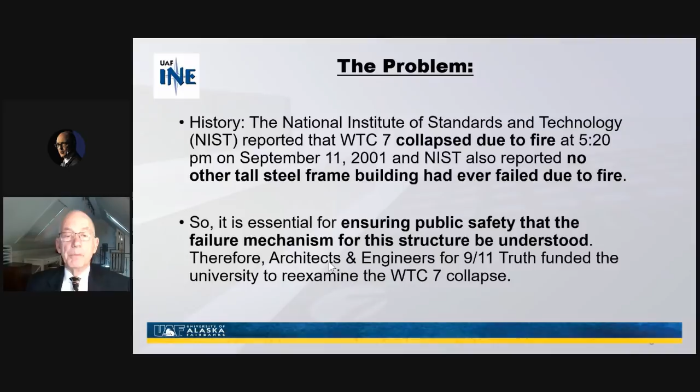The NIST report said that the building had collapsed due to fire. And they also said that no other tall steel frame building had ever failed due to fire. So it was essential for public safety that we understand the failure mechanism of this structure. And since the NIST report said that it had failed due to the unprecedented event of office fires, Professor Hulsey understood that this was a matter of supreme importance for our profession.

The science behind the study was first to examine the fire loads, which were supposed to have caused the failure on floors 12 and 13, and then determine how the building was going to react to the thermal loads. Secondly, rule out scenarios that couldn't have caused the failure. And third, identify the type of failures and locations that could have contributed to the observed collapse.

He used the same material properties that NIST used in their report to ensure that the input values for the materials would be the same.

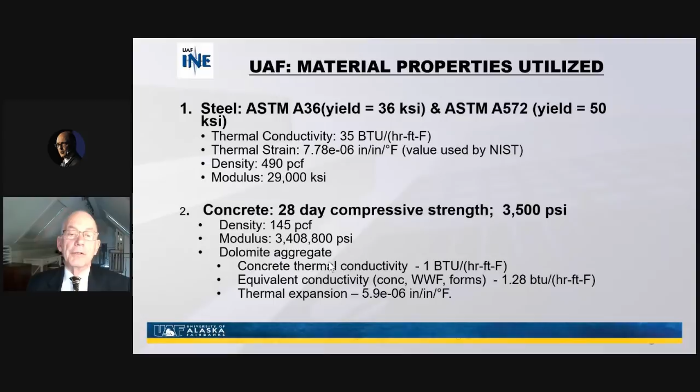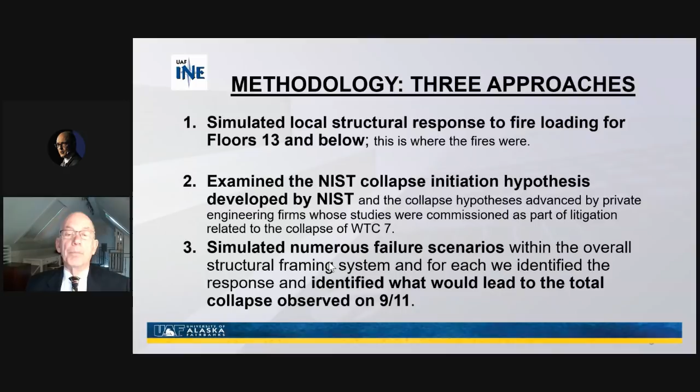First, he simulated the local structural response to fire loading to floors 13 and below, which is where the fires were. Then he examined the NIST collapse initiation hypothesis and the hypotheses advanced by the private engineering firms whose studies were commissioned as part of litigation related to the collapse of the building. And third, to simulate the numerous failure scenarios within the overall structural system that could have possibly led to the total collapse as it was observed.

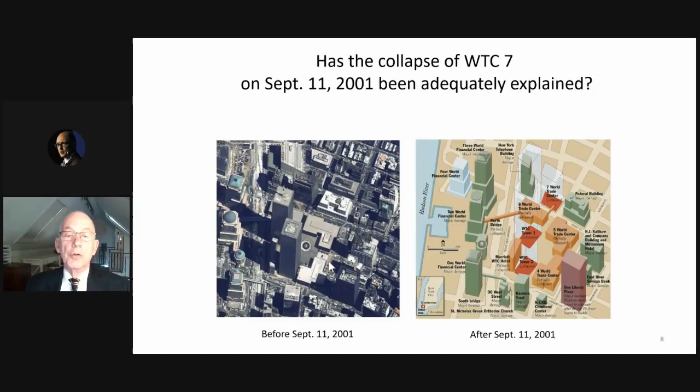The buildings and their relationship to one another are shown here. The towers, 1 and 2, the North Tower and the South Tower, Building 7, which was a 47-story structure to the north of Building 1, about 350 feet to the north of the first tower. The reports that have been issued on the Building 7 failure are these.

The FEMA report, which was a preliminary assessment, was issued in May of 2002. Then NIST, which was given the power by Congress to issue a report on the cause of the failures, issued their report on Building 7 in November of 2008. Then the Arup Group was hired by the plaintiffs, Con Edison, as a result of the fact that the Con Edison substation, which was built underneath Building 7, was damaged. They sued World Trade Center 7 in

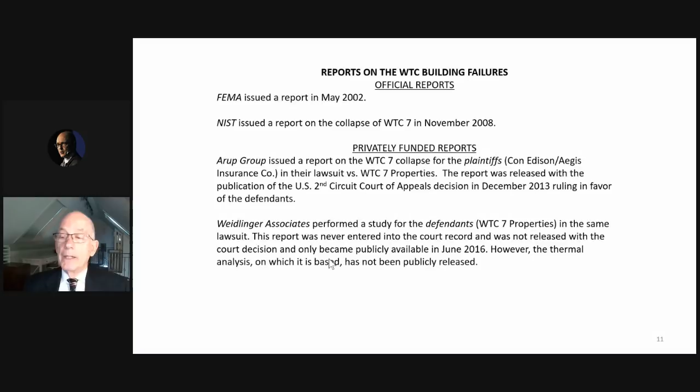2010. Then Weidlinger was another engineering firm which defended the World Trade Center properties in that same lawsuit. Their report, however, only became available in June of 2016 without their thermal analysis. And then our report, which was issued yesterday.

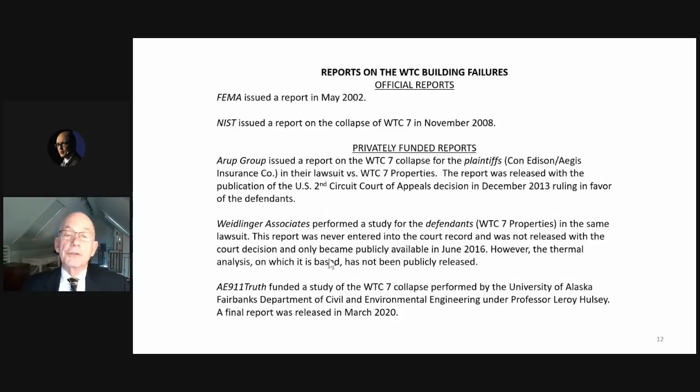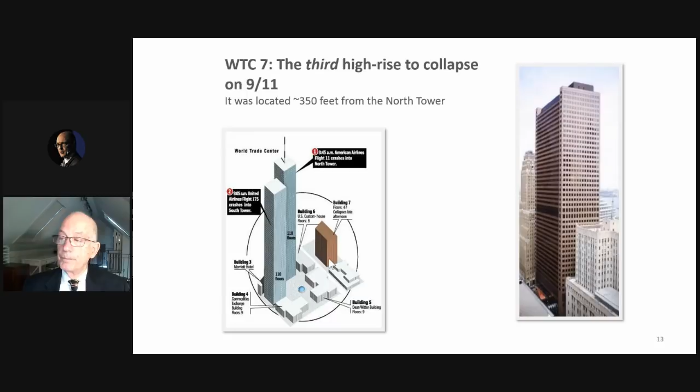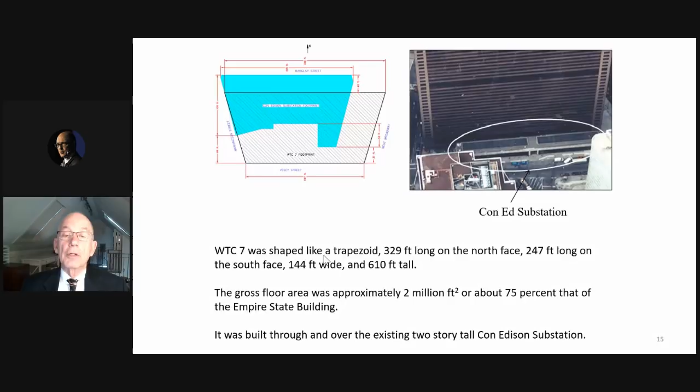The World Trade Center 7 building was the third high-rise to collapse that day. The location of the building was about 350 feet from the North Tower. It was 47 stories high. Each floor had about an acre of area. It was a trapezoidal floor plan. The gross floor area was about 2 million square feet, and it was built through and over the existing 2-story tall Con Edison substation. It contained 82 columns in its floor plan, 58 on the perimeter, 24 in the central core.

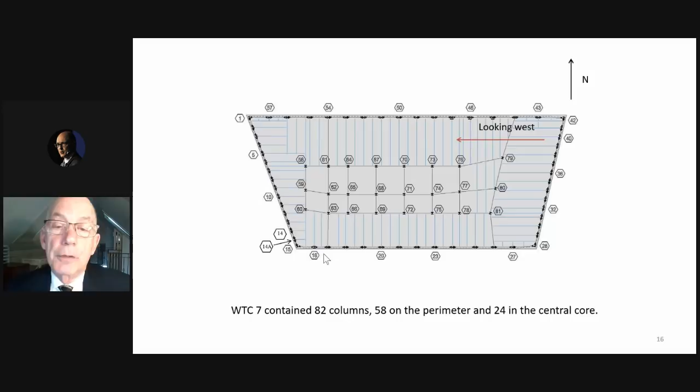We see that layout here. The area of interest is in the northeast corner of the building where the red arrow is. That is the area that NIST identified as the place where the initial event causing the collapse took place. We'll take a look at that here in a photograph taken at the time of construction of the building. Looking west from that corner, we see the girder of interest, determined to be called girder A2001 in the plans. And we see the beams coming in from the east side of the building, framing into the girder.

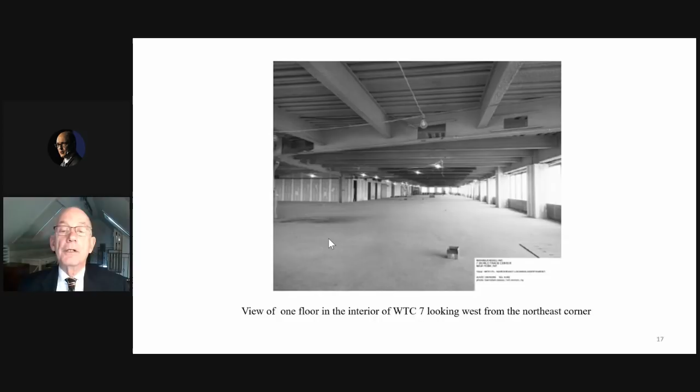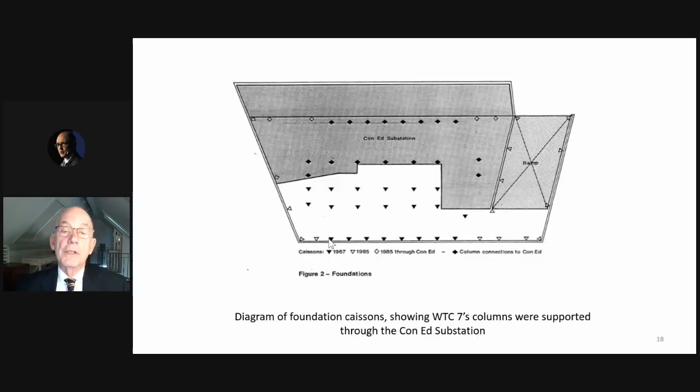This is a plan of the foundation showing the caissons supporting the Con Ed substation and the connections of the beam of the columns of World Trade Center 7 building to those caissons. A photograph taken during construction. We can see the perimeter columns here on the outside, the girders connecting those columns, the framing, and above that, we see the core columns coming up through the floors in the area of the elevators and the stairwells.

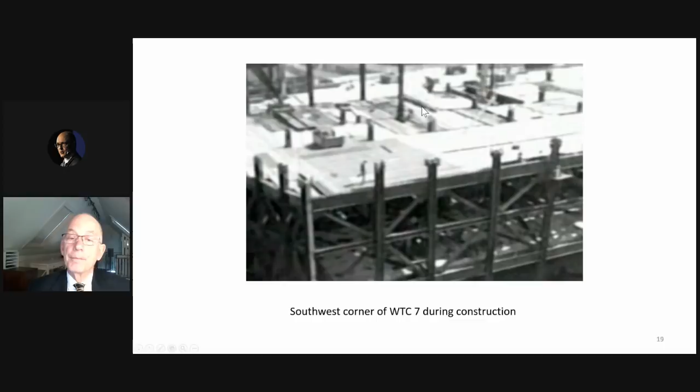The 610-foot tall building, which was not hit by a plane, collapsed that day in the late afternoon at 5:20 and turned into a 5-story pile of rubble in about 7 seconds.

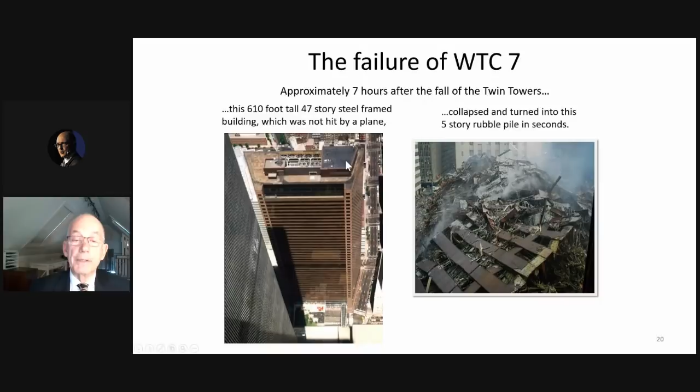For the third time today, it's reminiscent of those pictures we've all seen too much on television before, when a building was deliberately destroyed by well-placed dynamite to knock it down. Did they actually use the word brought down, and who was it that was telling you this? The fire department, and they did use the word, we're gonna have to bring it down. We heard this sound that sounded like a clap of thunder. A shockwave ripping through the building, and the windows all busted out. About a second later, the bottom floor caves out. The building followed after that, and we saw the building crash down all the way to the ground. And I turned in time to see what looked like a skyscraper implosion. Looked like it had been done by a demolition crew. The whole thing just collapsing down on itself. It was almost as if it were a planned implosion. It just pancaked.

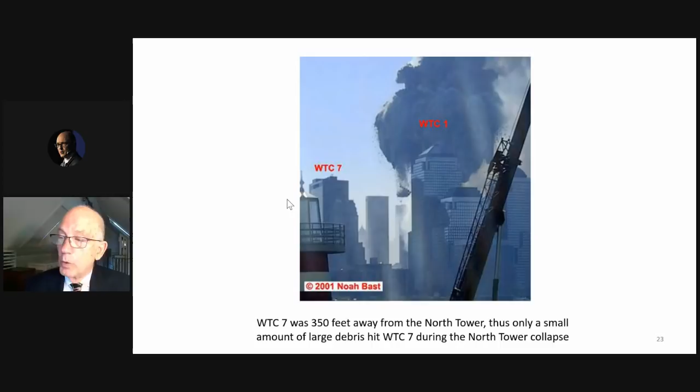Here you can see the relationship of World Trade Center 7 to the World Trade Center 1, which is collapsing as this photo was taken.

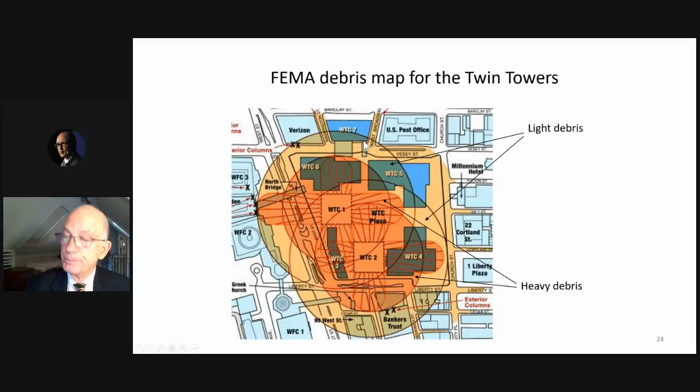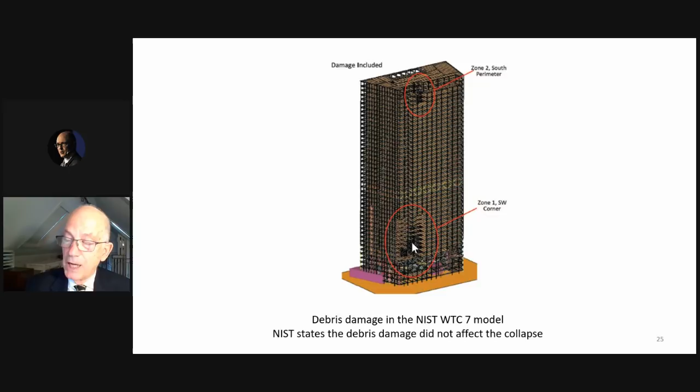The debris pile from the two towers is shown here in a FEMA debris map. We can see that World Trade Center 7 was hit by some light debris on the south face of the building. Here's FEMA's or NIST's representation of that damage. The damage in the lower southwest portion of the building is the area where the fires started, and it was presumed that the impact of the damage caused those fires to start. However, NIST stated that the debris damage from the towers did not affect the collapse in any way.

The fires themselves - at first FEMA thought they were maybe caused by diesel fuel in the building, which would be used for the backup generators. That was later disproved. Most of the diesel fuel was found in tanks underneath the building.

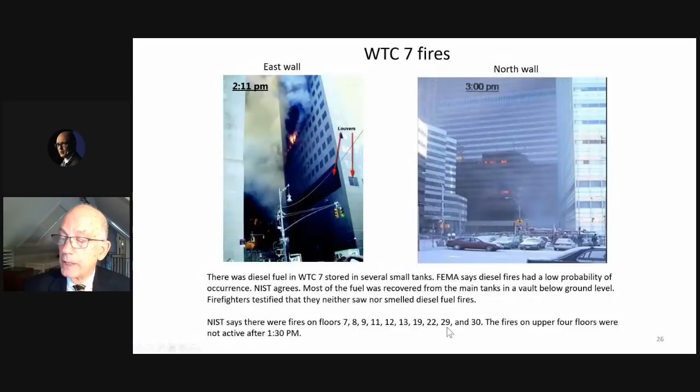We note, and NIST notes, and we agree with this, the fires of concern were on the 7th, 8th, 9th, 11th, 12th, and 13th floors. The fires on the higher floors - 19th, 22nd, 29th, and 30th - were out shortly after they began.

So the NIST World Trade Center collapse theory looks like this. On floor 13, these 5 beams in the northeast corner of the building were heated by the fire. They pushed on girder A2001, which ran between column 44 and column 79, off of its seat - or in some, they have an alternative scenario, which we'll discuss, maybe pulled it off. So they say it was either pushed off or pulled off its column seat at column 79.

And that caused the girder to fall, and it hit the floor below, hitting the same girder underneath it on the 12th floor, breaking it loose. Fire damage also contributed to other beams in that area failing at the same time. And that left column 79 unsupported because the floors cascaded down all the way down to the 5th floor.

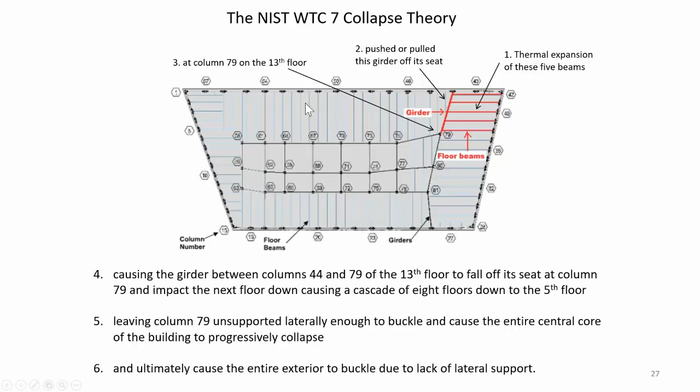So then you had a long unsupported column with a heavy load on it. It buckled, and that caused the entire core columns to fail in a progressive manner, which then led to the failure of the perimeter columns, and that's what caused the building to collapse. So that's the NIST collapse theory.

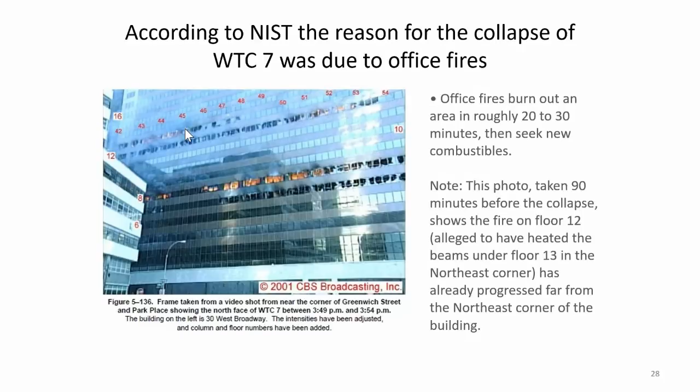From the NIST report, we look at the information regarding the local failure that initiated the whole event, namely the coming off of its seat of the girder A2001 at column 79. So this is column 79 here. Here's the seat that the girder sat on. It was supported by a plate, which was welded to the column.

According to NIST, that girder was considered to have lost its vertical support when its web was no longer supported by the bearing seat. The bearing seat on column 79 was 11 inches wide, so that when the girder end at column 79 had been pushed laterally at least 5.5 inches, it was no longer supported by the bearing seat.

However, the drawings showed that the plate was actually 12 inches wide, not 11 inches wide, and NIST actually later admitted that when they were informed of that.

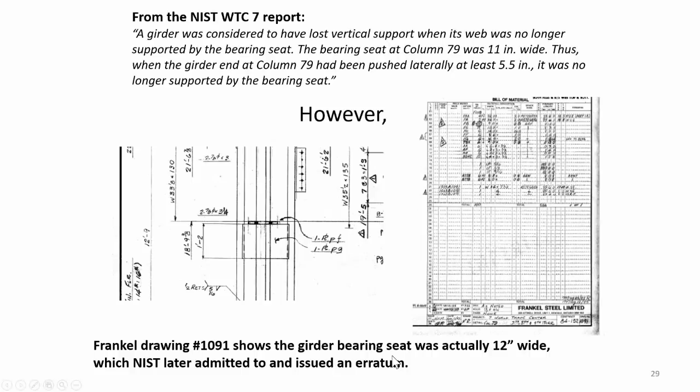Now, the NIST depiction of the girder sitting on its seat is shown here, and we see the web of the girder here sitting over the base plate, and it's got some clips attached to it. The plan view is here - you see the column with the girder coming in, sitting on the seat.

However, there's a problem with their depiction, and that is there were stiffeners welded to the end of the girder, welded to both the web and to the lower flange. This is the actual construction drawing, the Frankel drawing, that shows there were indeed stiffeners welded to the end of the girder. This makes a huge difference in their analysis.

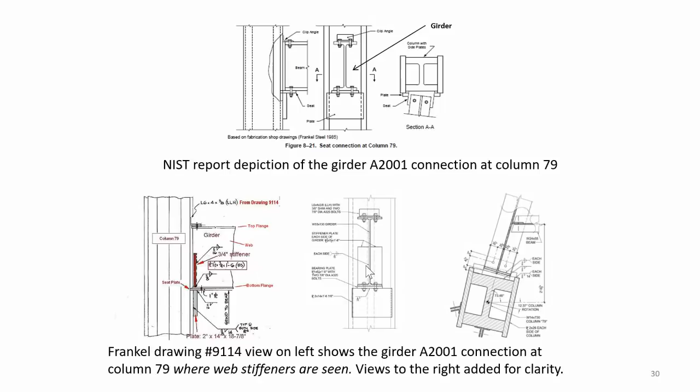This is a pictorial view of the same thing: the support plate, the base plate, the girder, the beams that were pushing on it, and the stiffener plates, which were welded to the web and the lower flange.

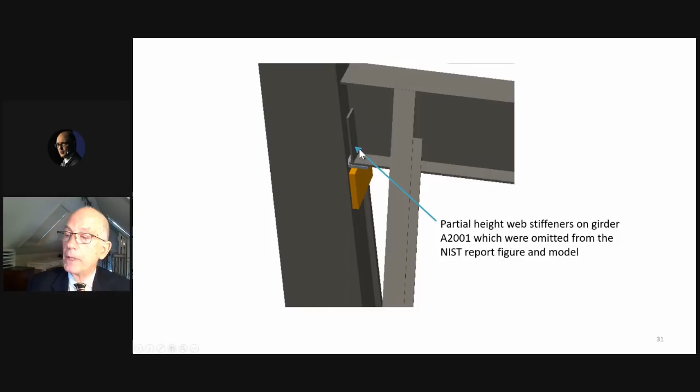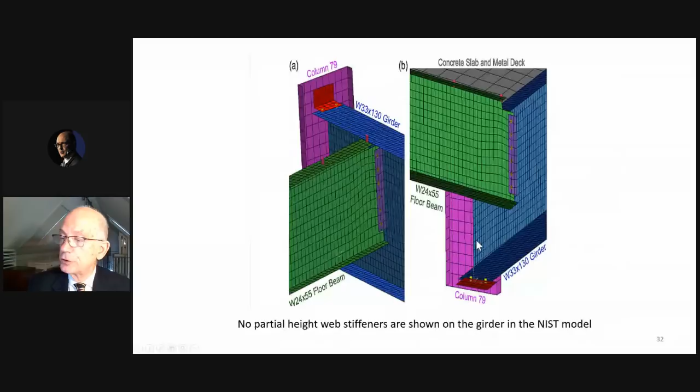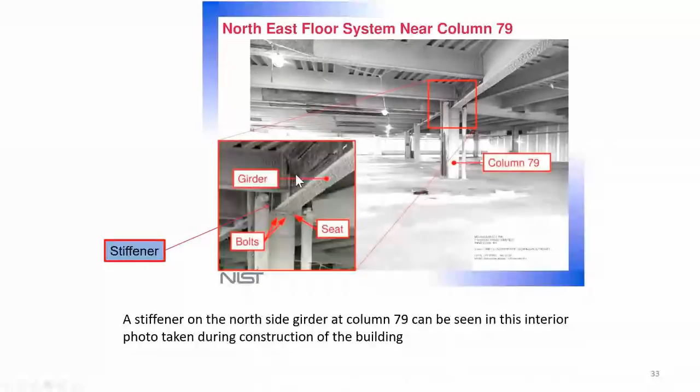In the NIST presentation, this is the beam, the girder, and the column. Again, you've got the girder and the column here. There are no stiffeners shown - they did not include them. We know that they were there; construction photos show that they were there. This is column 79 - here's the beam and the girder and the stiffener plate, clearly shown in the photographs.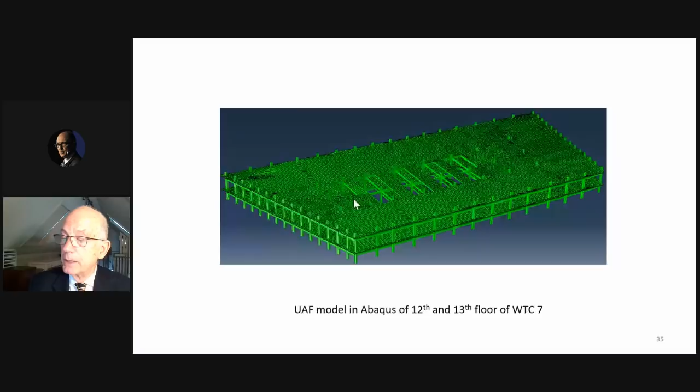Now, when Professor Hulsey and his crew did their finite element modeling of the building, they started with a model in Abaqus of the 12th and 13th floor. Here's the northeast corner, perimeter columns, the core columns here, the elevator shafts and stairs here. This is column 79, located here.

The UAF study took the worst case scenario for the temperatures used in their model. This shows the 13th floor with color variation showing temperatures, displayed in Celsius at 675 degrees, which is about 1,200 degrees Fahrenheit.

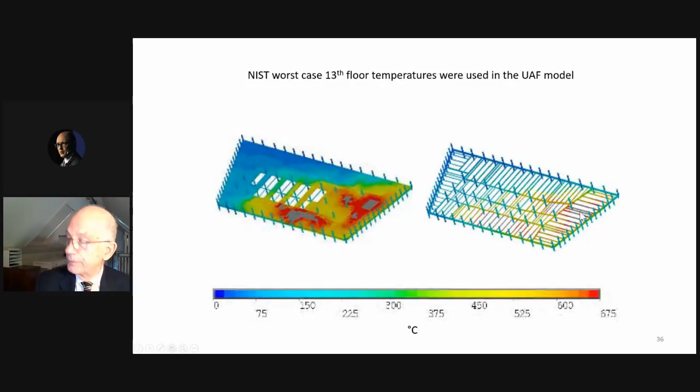So they show the deck here, the concrete deck. It sat on the framing, and we can see the temperatures that the various elements experienced.

Here's the UAF finite element model of that northeast corner of the frame. You can see column 79, column 44, girder A2001, the 5 beams that frame into it from the east, and the perimeter columns.

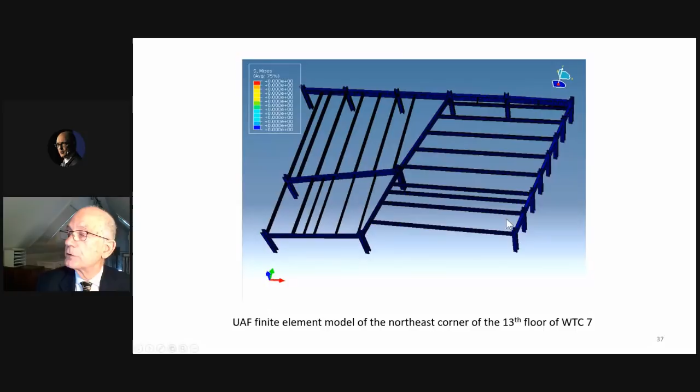The finite element analysis that they ran showed, here we're looking at the critical point, the point of initial failure according to NIST.

This is the girder, this is the beam that frames into it next to column 79. Column 79 is not shown for clarity. We see the base plate though that was attached to the column, and the stiffener plate that supported it, the support plate. Here are the stiffener plates, which were welded to the web and to the lower flange.

The UAF analysis showed that even if we allow the beams to push the girder well past the corner of the support plate, the lower flange does not fold up and allow the girder to fall. This is a depiction that shows the beam pushed it well beyond what it actually could have pushed it, because in order to get the girder pushed that far, the UAF had to increase the coefficient of thermal expansion of the beam by 40%, which is unrealistic.

But they were trying to get this girder past the seat and find out what happened. They found out that the girder would not fall because the lower flange would not fold up. This invalidates the initiation event that NIST says caused the entire event.

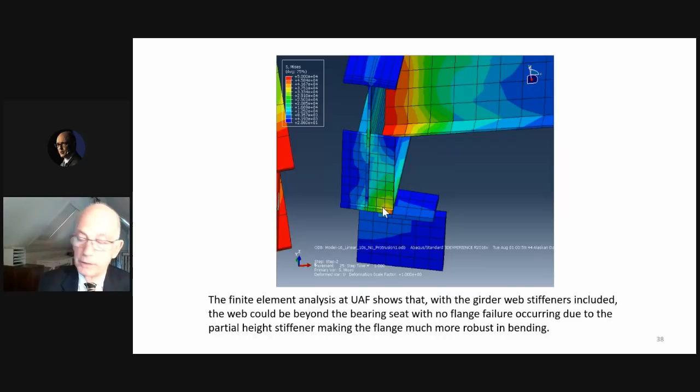NIST later admitted leaving the stiffeners off of the girder. One of our researchers, David Cole, sent them a letter, and they sent back a letter that said the web stiffeners shown at the end of the girder prevent web crippling. The structural analyses of World Trade Center 7 did not show any web crippling failures. Therefore, the web crippling plates did not need to be included in the models or the analysis.

This letter was signed by the head of their public affairs office, Michael Newman. Michael Newman is not an engineer. No engineer would sign that document, I'm quite sure, because they would lose their license if they went on record saying that the web stiffeners would not have any effect on the flange stiffness.

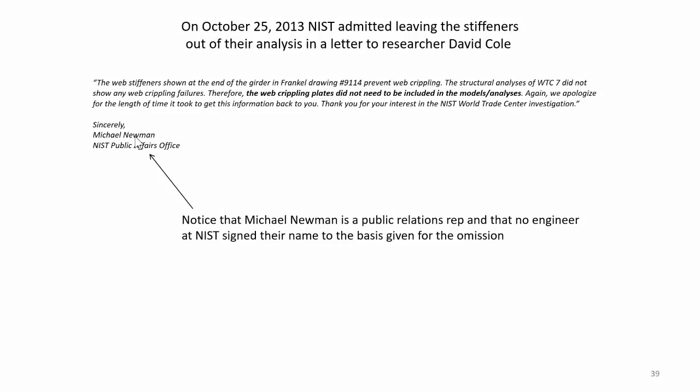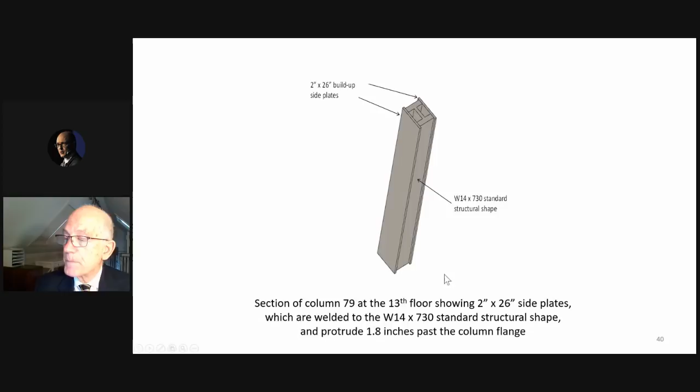Other problems are that column 79 and all the columns had built up side plates 2 inches thick that were welded to the column at every floor connection. They protruded 1.8 inches past the flange of the column. So when you heat the beams and you heat the girder...

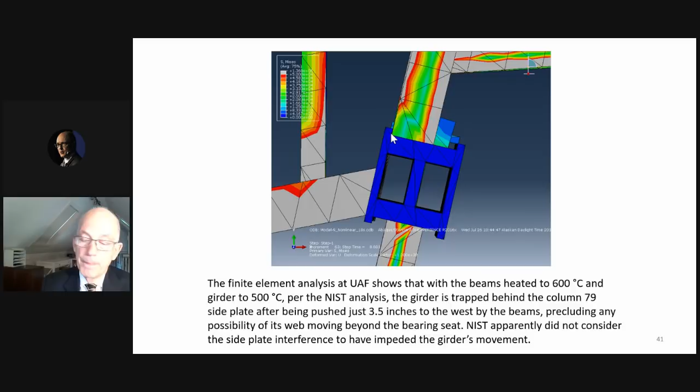NIST's model said the girder was heated to 500 degrees centigrade. Therefore, it would expand, pushing it up against the flange of the column. When the beam attempted to move it to the west, it would get trapped behind the side plates. For some reason, NIST does not, although they showed the side plates in some of their drawings, give any explanation for how the girder could have cleared the side plates and therefore come off of the support plate. So that is another serious problem with their analysis.

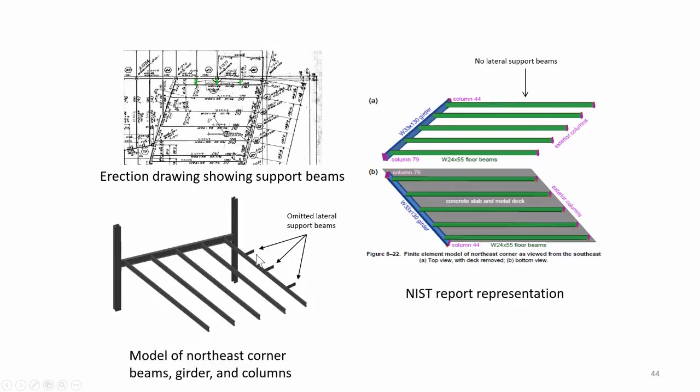So the NIST representation, shown here, is a little harder to see. Here's column 79 over here, and these are the beams. This is column 44 here, and there are no support beams shown here. So even though there were 3 support beams, they were not shown in the NIST analysis.

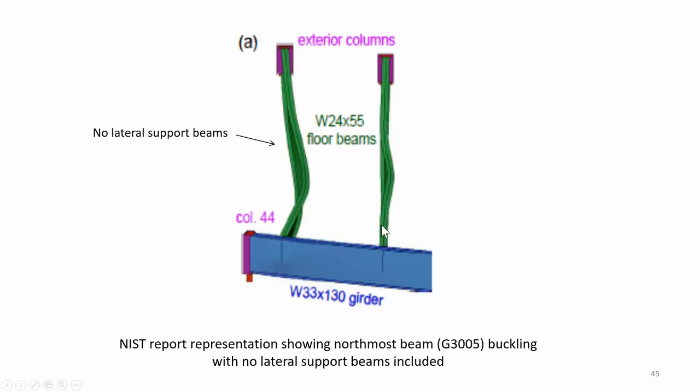What that means is that when NIST heated the floor, that beam buckled, and the other beams adjacent to it also buckled. The UAF report confirmed that if you left off these 3 beams, this northernmost beam would buckle when heated.

Now, the reason why I think NIST needed that piece of information to be omitted is because they also claimed that this girder could have been pulled off of its seat at column 79, and that would have been caused by the shortening of the beam due to buckling, with the cooling process perhaps drawing the girder off of the beam to the east instead of pushing it off to the west.

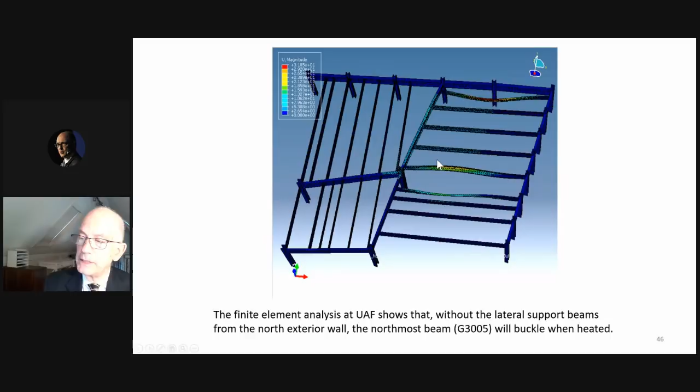The UAF analysis showed that when you left those 3 beams in there, the beam didn't buckle, and therefore the girder would not have been pulled off to the east.

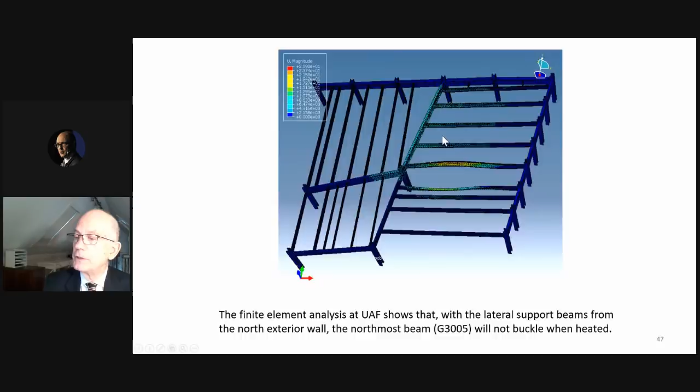But UAF went even further and said, okay, let's assume somehow that the girder could fall. What would happen then? NIST says that the girder would fall down, hit the girder below it on the 12th floor, break it loose at its connection, and cause that section of the floor to fall, which would lead to a cascade of floors all the way down to the 5th floor, which would then cause column 79 to be unsupported for all the floors between 14 and 5.

Which would then cause it to buckle due to lack of lateral support. Now, the analysis that everyone agrees with is that in order for this connection here at column 79 to be broken, the force of the impact of the girder above hitting it would have to be 632,000 pounds. That's what it would take to break the welds loose here and cause the 12th floor girder to collapse.

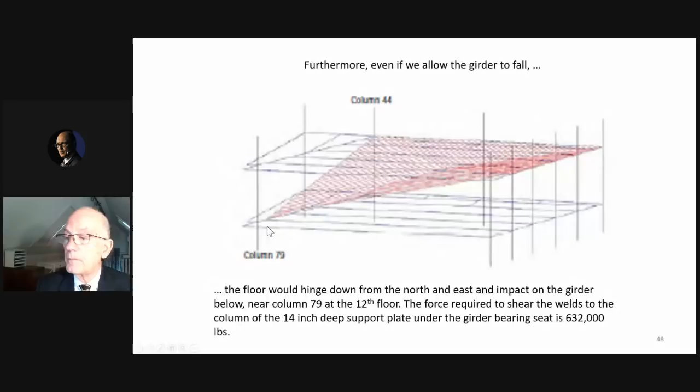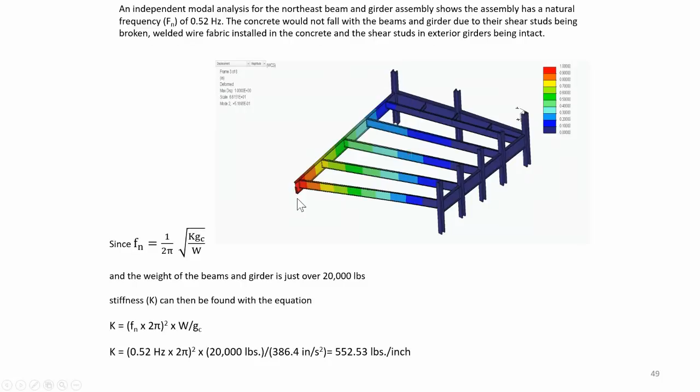So the UAF did a modal analysis of that framing section. Here we see it again. Here's column 44. Here's beam A2001, the 5 beams. They let it fall, let it hit the girder below on the 12th floor, and they did an analysis. What they found was that after you do the stiffness and figure the frequency and run through all these calculations, which I'm not going to reproduce here, you only get a force of about 62,000 pounds for that girder hitting the floor below it.

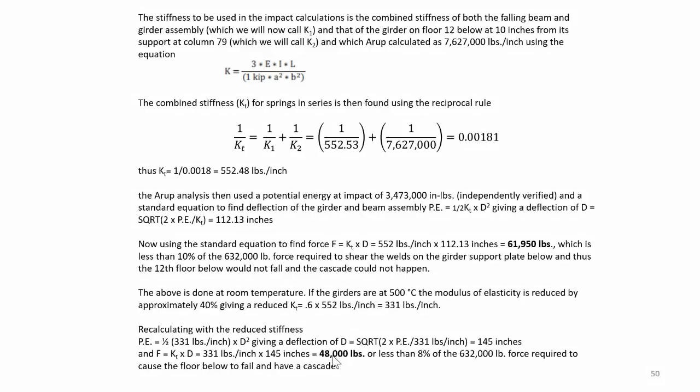So that's only about 1/10 of what you would need, 632,000, to break it. And furthermore, if you heat it up to the temperatures that NIST says it was heated to, that force is reduced to about 48,000 pounds. So the conclusion is, even if the initiating event somehow could have occurred, which we know it can't, it couldn't have caused the next event in the progression to take place.

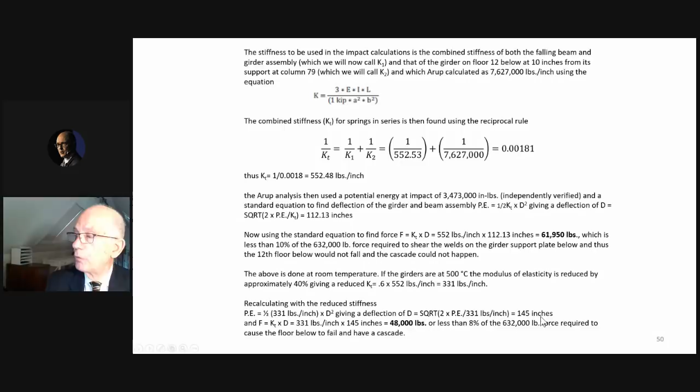Remember, they claimed this was a progressive collapse. First event, girder coming off the column. Second event, the girder causing the girder below it to break loose. So both of those steps have been shown to be impossible.

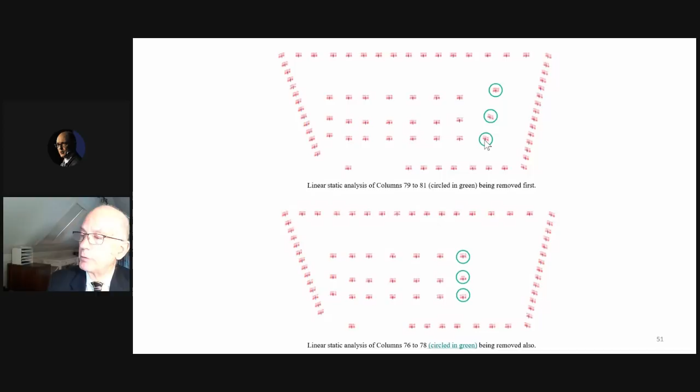Now, the linear static analysis that UAF ran: they took this scenario, the NIST analysis, and said okay, we go to the next step. We look at these columns and take them out. We say that they buckled between the 14th floor and the 5th floor, and we take them out. Then we take out the next columns that they say collapsed next to them in the core, column 76 through 78, and we see what happens.

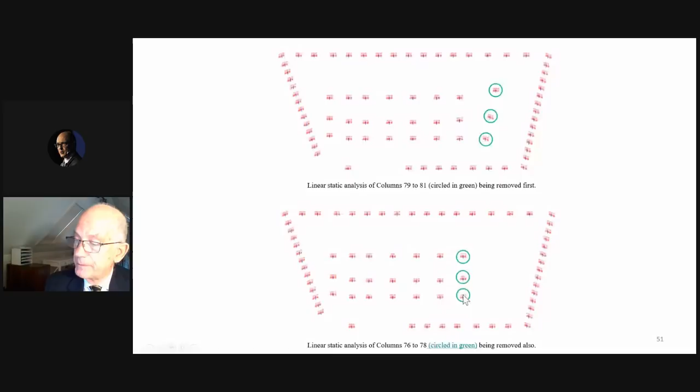What happens is this: the collapse of those 6 core columns overloads the perimeter columns in the southeast corner of the building, and that causes the building to collapse by tipping to the southeast and falling over. This would be what that would look like.

So the collapse scenario, the third step in the progressive collapse that NIST is proclaiming, would have resulted in the building tipping over and falling down, not falling straight down into its own footprint. Notice again that the east penthouse is still intact in that scenario.

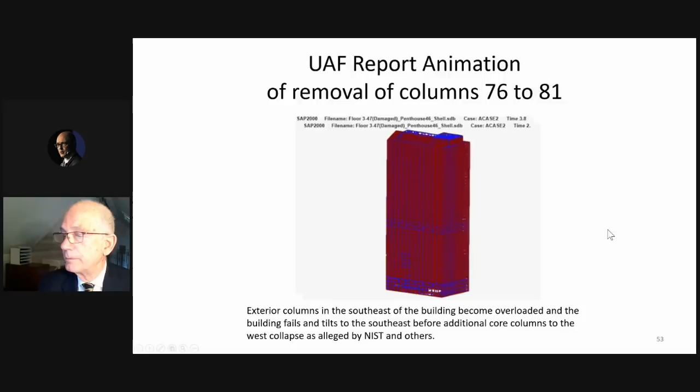Let's see if we can get this to move on. Okay, now the UAF also did a global collapse animation in which they tried to get the building to act as shown in the actual footage.

And this is what that would look like. See, the east penthouse collapses first, then the west penthouse, and shortly after that, the entire building comes straight down.

The UAF finite element model was able to reproduce to a very close proximity the actual collapse mechanism. Here's another look at it from straight on, looking north.

They only got this to occur because they took out all the interior columns over 8 stories low in the building, followed 1.3 seconds after that by the perimeter columns. And that was the only way that they could imitate the actual event.

In addition to that, prior to that, they had to take out the 3 columns, 79, 80, and 81, high in the building as a separate event to get that east penthouse to come down first. And then the core columns after that caused the rest of the building to come down.

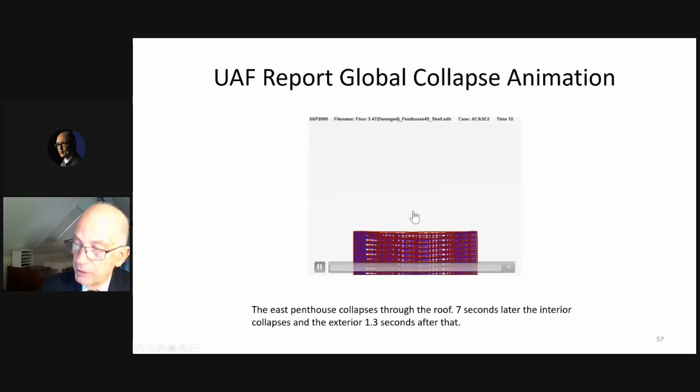So there's the upper floors underneath the east penthouse, then the core columns down low pull down the west penthouse and cause the entire building to collapse. That's the only way they could replicate what we saw.

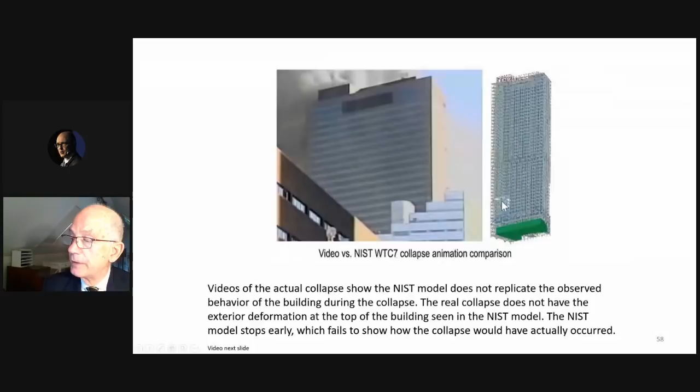Here we see a video of the event compared to the NIST model of the event. We'll see, here's the east penthouse, we're looking at this from the north. Same thing here. Down here in this corner, you'll see the area that NIST says caused the event to occur on the northeast corner of the building.

See there, this is their event, which they say pulled down the east penthouse and caused the building to collapse. Compare with what's happening on the left. Notice the distortion of the building in their model versus the actual event.

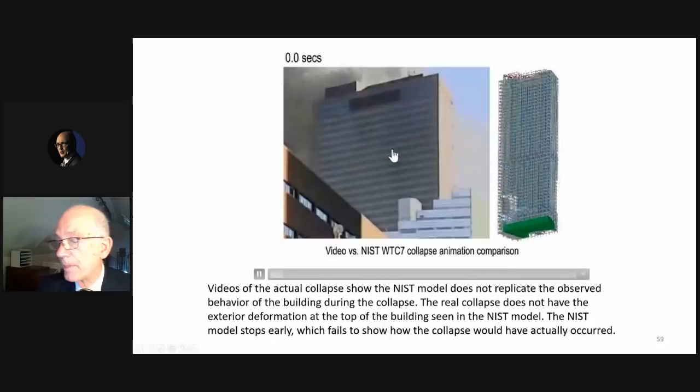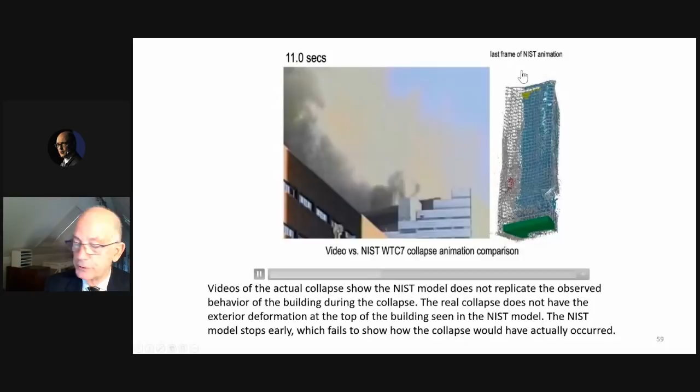The NIST model also stopped about 2.8 seconds into the actual collapse once it began to collapse, and they never show the rest of it. This is a picture of what their model would have looked like a little further down the line, which shows that the top of the building swings around at more than 90 degrees to the central axis of the building,

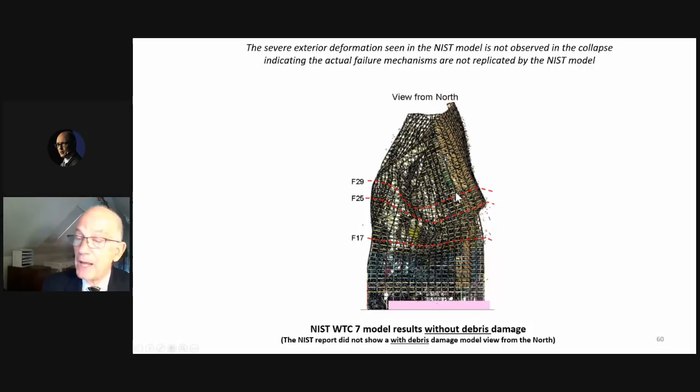The question of free fall acceleration was brought to the attention of NIST when a physics teacher, David Chandler, using a video of the event, proved that the entire roof line was in full free fall acceleration for about 2.5 seconds near the beginning of its collapse. NIST was confronted with this fact, and they were finally forced to admit it, but they never looked at the implications of that free fall.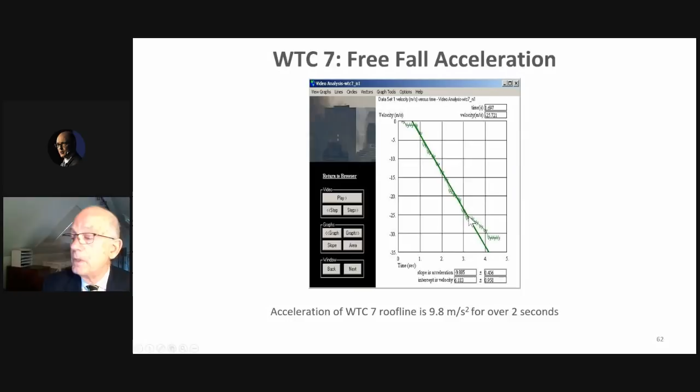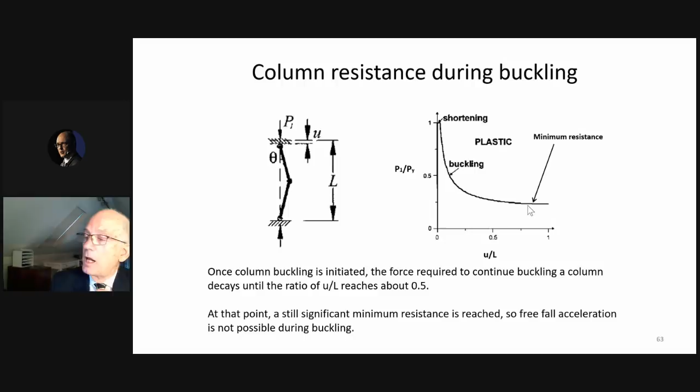Now, if the column resistance had been actively activated by the collapse of the columns as NIST theorizes - when you buckle a column, the resistance trails off to about maybe a third of its total strength after the column has collapsed to a great extent - what this means is that the columns will always give some resistance to the collapse of the building. So that means that their model cannot account for free fall at all. So free fall is another fatal error, proving that their mechanism could not possibly account for what happened.

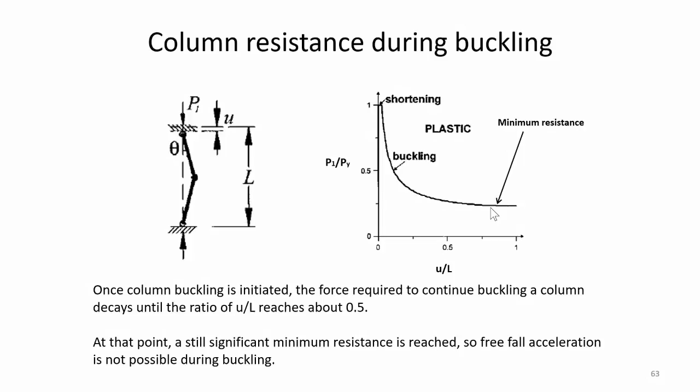In free fall, all the potential energy is converted to kinetic energy, and there's no energy left to do any other work. So the upper part of the building, if you took out 8 stories, could not have been crushing that portion of the building. So those columns were not available to give any resistance.

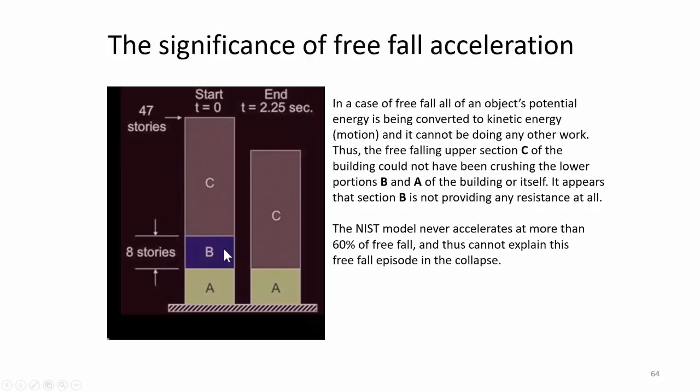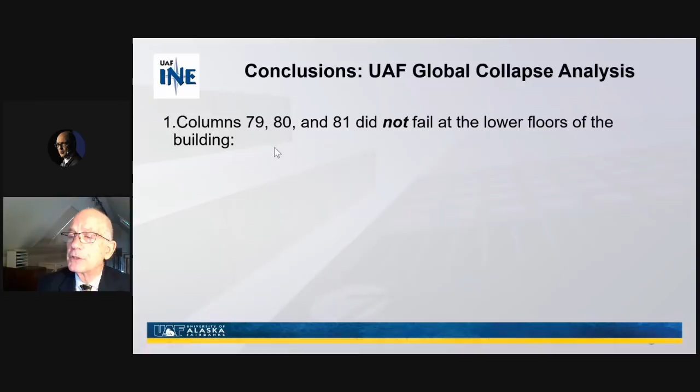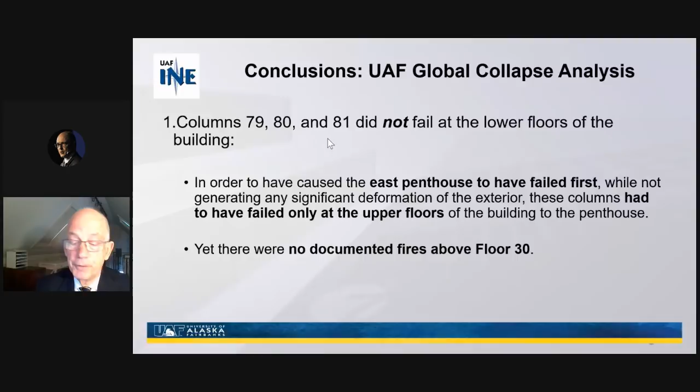So looking at the conclusions of their collapse analysis, we see that columns 79, 80, and 81 did not fail at the lower floors of the building. And in order to cause the east penthouse to fail first, while not having any deformation of the exterior, these columns had to have failed only at the upper floors of the building. But there's no documented fires above the 30th floor, so that is impossible from their perspective.

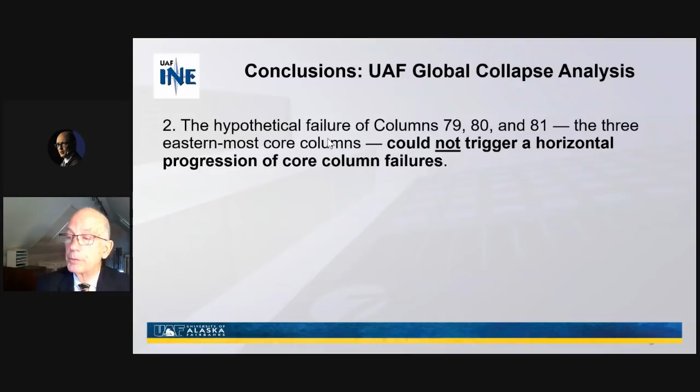Secondly, the hypothetical failure of 79, 80, and 81, the 3 easternmost core columns, could not trigger a horizontal progression of the core column failures. So the hypothesis of NIST and the Arup and Weidlinger reports that the buckling of column 79 would trigger a progressive collapse of the entire building are invalid. And the collapse of columns 79, 80, and 81 high in the building would have had to have been a separate and distinct event.

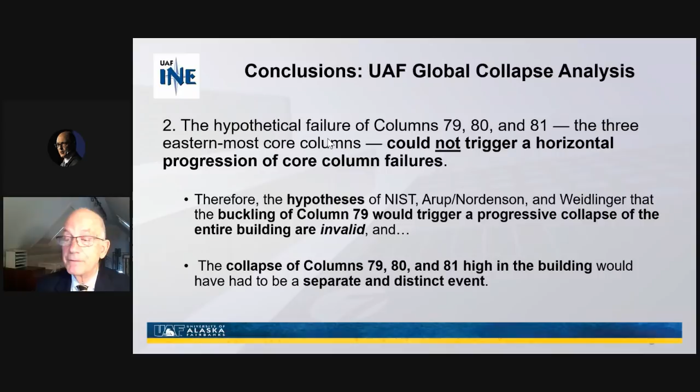If we assume that the failure of columns 79, 80, and 81 could lead to the failure of the next row of core columns, the additional hypothetical failure of those 3 columns, 76 through 78, would then overload the exterior columns around the southeast corner of the building instead of overloading the next row of core columns to the west, and that would result in the building tipping to the southeast, not in a straight down collapse.

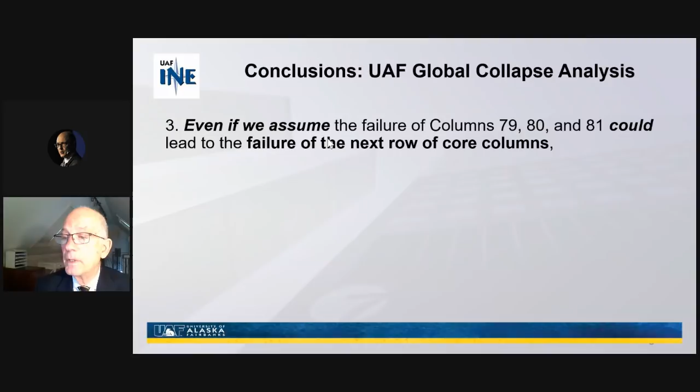And here is the conclusion that is most revealing and definitive for our purposes, and that is that the simultaneous failure of all core columns over 8 stories, followed 1.3 seconds later by a simultaneous failure of all exterior columns over the same 8 stories, produces almost exactly the behavior observed in the videos of the collapse. That collapse could have started at any of the various floors, starting at floor 16 and below, and produced the same behavior. So here we have definitive proof that the observation that most people make when they see the building collapse, that is, it looks like a controlled demolition, is validated by the study showing that a progressive collapse was not possible. It had to be an almost simultaneous event, which could only be accounted for by a controlled demolition event.

So this proof here, together with the preceding proofs that the progressive collapse could not have occurred, is fundamental to our claim that we need to have a new investigation of the building's collapse.

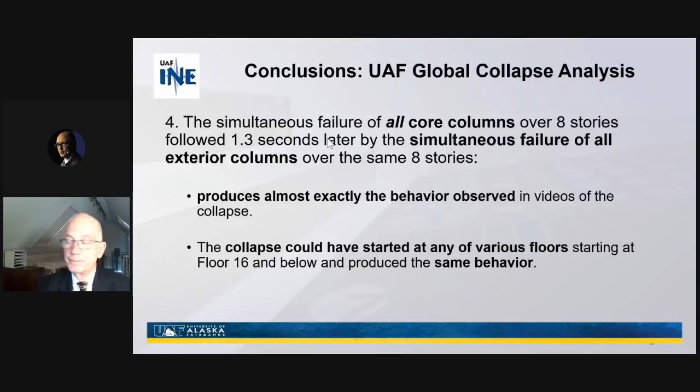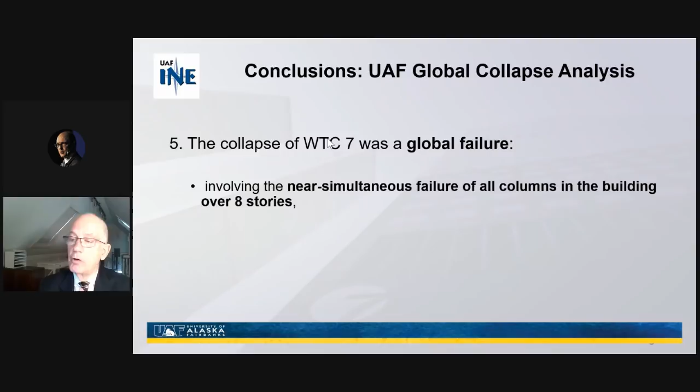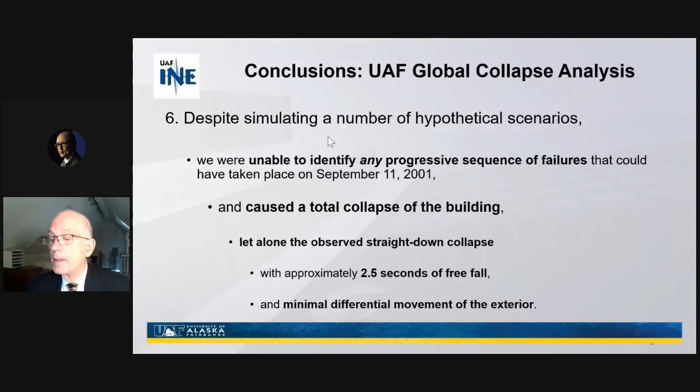Lastly, the conclusion that the UAF study made was that this is a global failure - it had to be near simultaneous failure of all columns in the building over 8 stories, not a progressive collapse involving sequential failure of columns. Despite the UAF team's simulating of a number of hypothetical scenarios, they were unable to identify any progressive sequence of failures that could have caused a total collapse of the building, let alone an observed straight down collapse with approximately 2.5 seconds of free fall and minimal differential movement of the exterior.